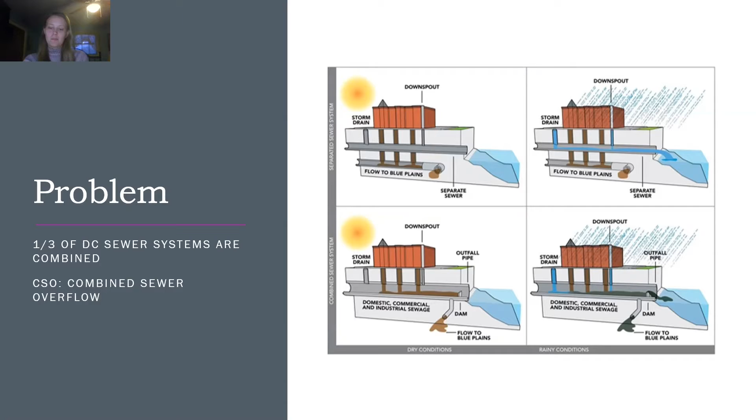Thank you, Hannah. Some of the solutions that the Clean Rivers Project has been implementing are the following. They have replaced some of the combined systems with separate sewer systems. However, this does come at a high cost and it involves a lot of construction, as you have to remove one system that's currently being used to build another system. And this has to be done for every home in the combined sewer systems.

They have also built overflow tunnels that run below the surface. These tunnels take the overflow from a rain and they prevent it from going into the rivers and they take it to the treatment plants. This also comes at a high cost, but it is a very effective way to keep the rivers clean. They have also implemented green infrastructure throughout the communities that have combined sewer systems. This comes at a low cost and also provides benefits to the environment as you are using green infrastructure.

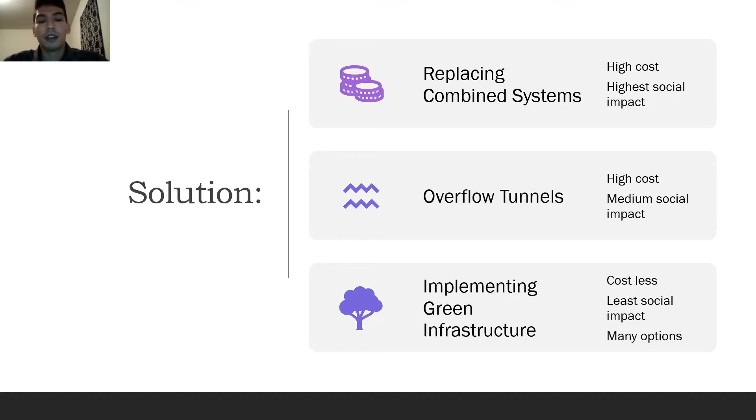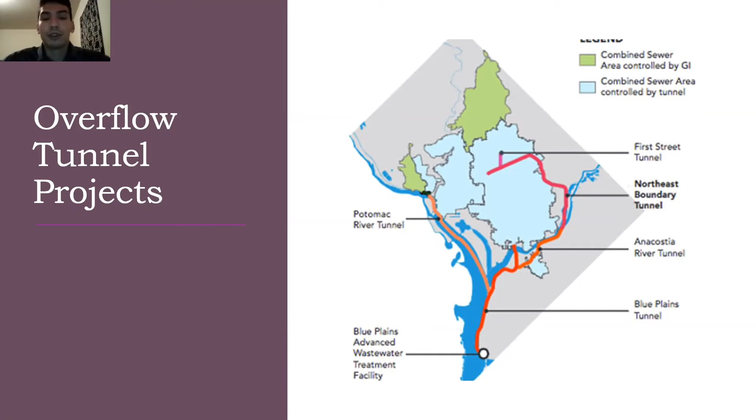These tunnels come into effect whenever you have large amounts of rain, as during these times the combined sewer systems are overburdened and overflow. Before, they used to overflow into the rivers. However, with the tunnels, all that overflow is directed through the tunnels to the treatment plants. And these tunnels are between 30 and 40 feet in diameter, so these are very large tunnels, and they run about 75 to 122 feet below the surface.

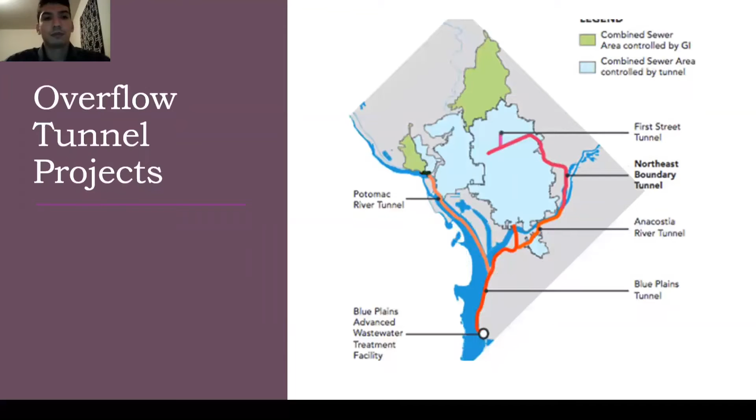The tunnels, however, are not a green infrastructure. The types of green infrastructure that are used in the communities include bioretention gardens, pervious pavements along the roads, green roofs, and downspout disconnections and rain barrels. I'll now hand this off to Joshua so that he can tell you all a little bit more about how these green infrastructures are used in the communities.

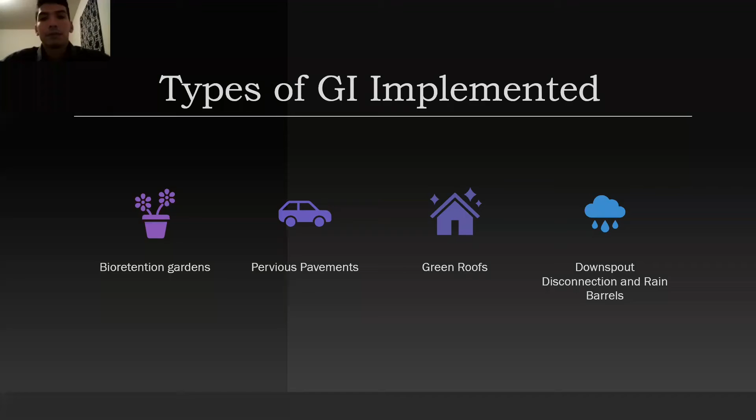Thank you, Edgar. Bioretention gardens such as planters and curb extensions are being implemented in the DC area. Planters are a great way to slow down the process because the stormwater has to infiltrate into the ground before it makes its way into the storm system. A curb extension is another way of slowing down the process by adding plants to the curb and sidewalk that have to absorb some of the runoff before it makes it to the storm system. The curb extensions also slow down traffic for that road.

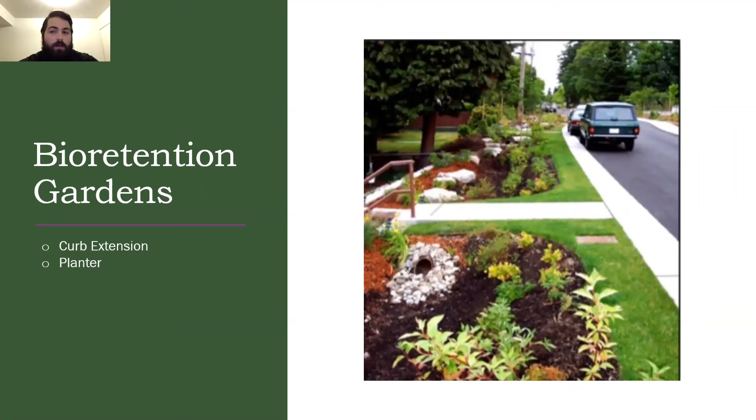Pervious pavements are an effective means of addressing environmental issues such as CSO. Pervious pavement captures stormwater and allows it to seep into the groundwater, thus reducing stormwater runoff. Pervious pavements are primarily used in parking lanes, roadway shoulders, alleys, and courtyards. Pervious pavements reduce water volume that the sewers have to handle. They also reduce runoff contamination. I will now hand it over to Cole to talk more about green infrastructure practices. Thank you, Josh.

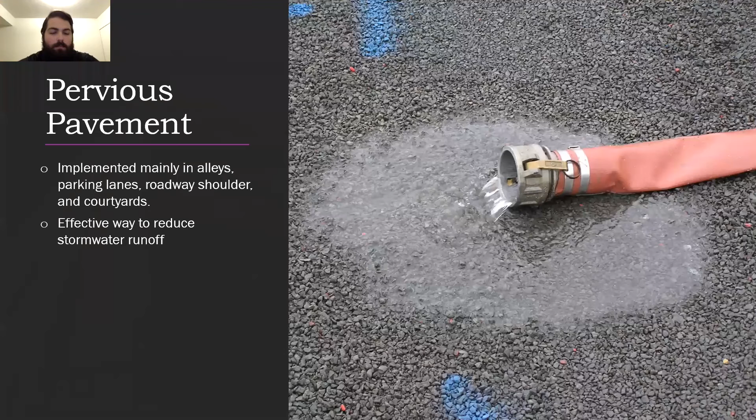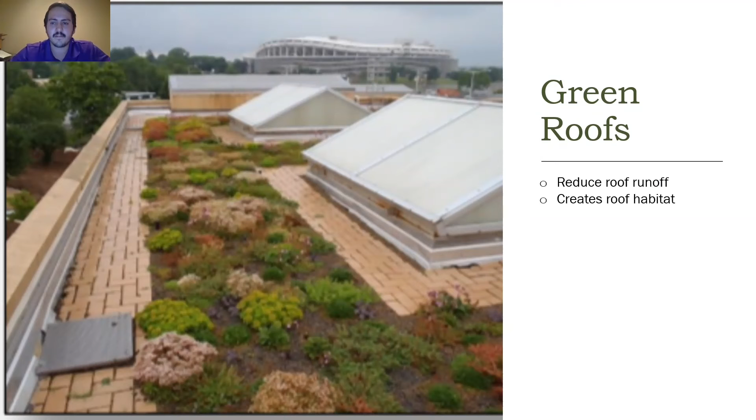Another type of green infrastructure that is being implemented is green roofs. A green roof is a roof that is partially or completely covered with vegetation that allows for reduced runoff from the roofs. They are effective in reducing stormwater volumes. Green roofs also create habitats and add aesthetics to the building.

Rain barrels are another simple form of green infrastructure. Disconnecting downspouts from the roof and gutter system and directing the stormwater into a barrel for reuse is a simple yet effective method. This method reduces the amount of stormwater that enters the system. DC has provided free rain barrels to homeowners who have volunteered so far. I'll now hand it back over to Hannah.

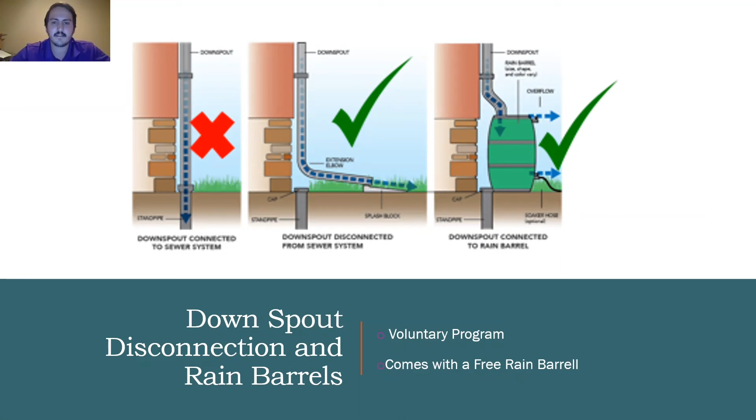This project is projected to be completed sometime in 2030 and will have a great impact on lowering the CSO overflow that's being dumped into the rivers.